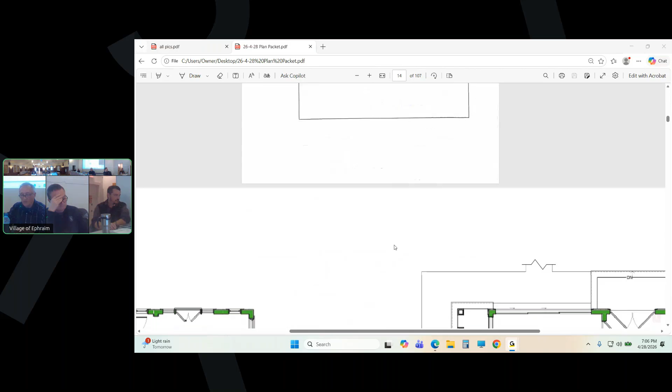For those that weren't here, the HPC did vote 3-1 to approve this. One of the stipulations was that some of the outside lanterns be removed. We didn't come to an exact number, and everybody was okay with it. One of the members was concerned about the railings on the water side, and pretty much comments about the roof lines came up, but it appears to have been better than the previous generation was. Other than that, that's about it from HPC.

I do have one comment or one question for everybody out there: do you have samples for us to look at? Okay, good. Yes, I do. All right, could you state your name for the plan committee, please? Drew Willman, Deleers Construction. Okay, thanks, Drew. Rick, why don't you start out?

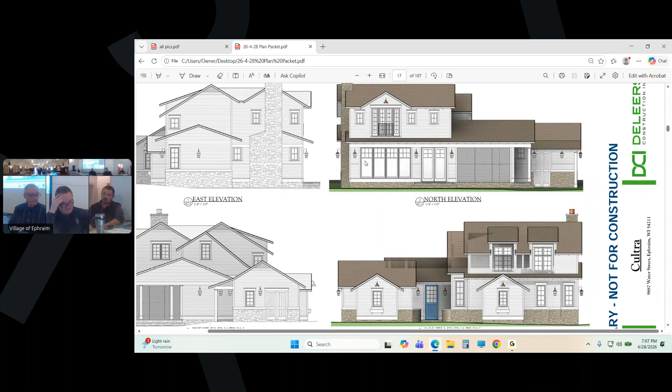My one concern that I have is the sheer number of roof lines. Can you give roof pitches for each one of those separate roof lines?

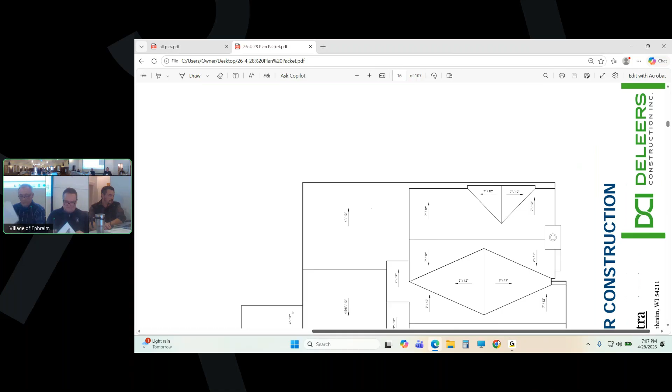Yeah, you're welcome.

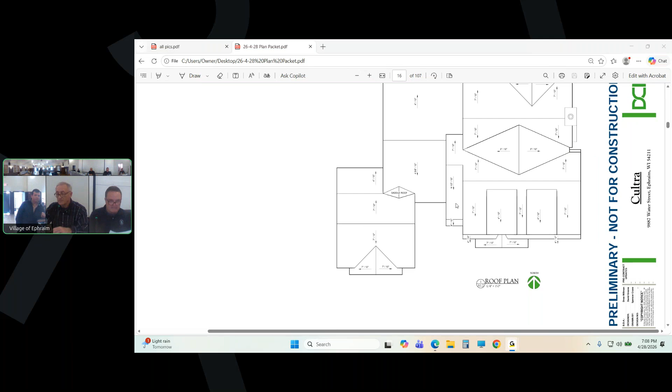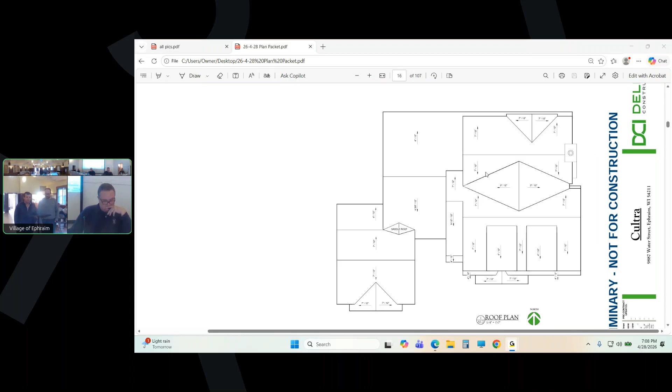This is John Cultra. I just wanted to introduce myself to those I've met a number of folks, but not everybody. I think my wife Victoria is on the line, as well as surprisingly one of my sons, so it's good to see some engagement from the younger next generation. Victoria and I were introduced to Door County and Ephraim in particular in 1992 by the Schmeltz family, Tony and Barb, and instantly fell in love with it, and haven't missed a summer or season since. We love Ephraim in particular, and all 4 kids, ranging from 25 to 14, every one of them has spent a lot of time here in the summers. So what we're trying to accomplish with this house is, as we've been rearing children for 25 years...

We have 3 years left with the freshman in high school graduating hopefully shortly. We plan on spending a lot more time in Ephraim, and each structure has a useful life to it. This house in particular we've been kind of patchworking for a while. We love the home, love the location, but unfortunately it just needs to be rebuilt. Our thought process is to get that going now, so it's ready for when we can spend as much time as we'd like up here. We really appreciate all the time and effort the planning committee, as well as the historical committee, have given to this. We want an end result we're very proud of, that the community is proud of, that fits well with the history and nature of Ephraim, and we really appreciate all your guys' hard work and consideration.

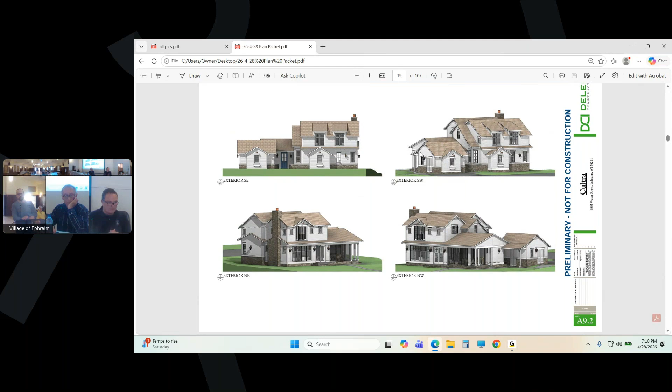I want to commend you also, I've been on the committee for the different concept reviews, and I appreciate your efforts to get the project closer to a quote-unquote Ephraim-looking house. You heard the comments from the HPC, and I share some of the concerns. In Ephraim, as we can see, the historic buildings have very simple roof lines.

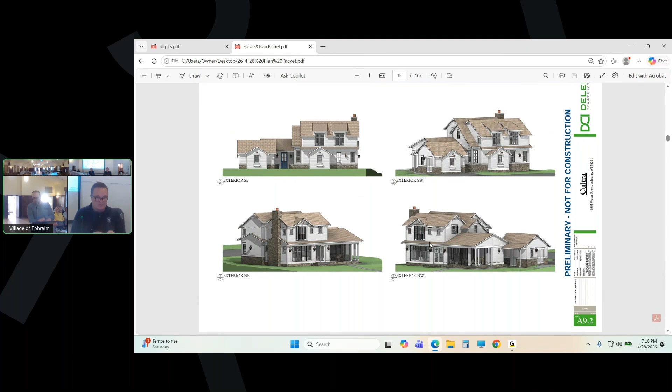My understanding from the materials is that the footprint is smaller than the existing home. Is that correct? That's correct, yes. But the additional space is being added upstairs, is that correct? To the extent the house is bigger by a few hundred square feet. Correct. Yep, okay.

I guess I also share, if some of the lighting could be reduced, I think I'm kind of consistent with the comments there.

I would ask, looking at the south elevation, and I don't know, I'm not an architect, but the home would be a little less busy if that roof line that is in the middle here -- I'm going to ask maybe a dumb question -- is that absolutely necessary for the design of the home? It is. The only reason that's there is for the staircase, to maintain head height to get to the second floor. Other than that, that roof does not cover anything other than the staircase.

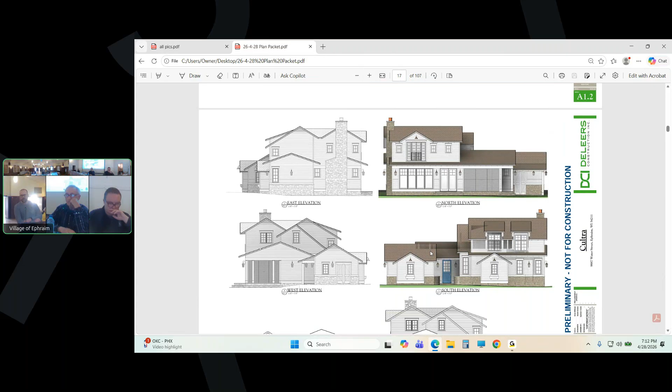For the staircase, and the staircase would need to be located in that part of the home. Yeah, we'd want it there, central to the layout of the home.

I'm having a tough time with the roof pitches, I just can't see this well enough. The shallowest roof pitch, is it 4/12 or 6/12? I can't tell, is it three? There's a saddle, non-visible from the ground, right there in the middle. That is a 3/12. Basically trying to keep it below the peaks of the other two ridges, so that brings it to a 3. But other than that, yes, everything is 4 or above.

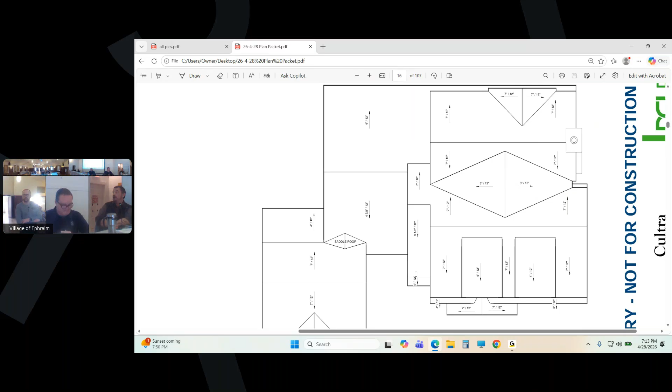So can we, with a non-primary roof pitch, accept something less than a 6/12? I think that's a question we probably need to address. I think there's a specific carve-out for dormers, I can carry on and try to find that language. I'm pretty sure it says the only way you can go below 6/12 is via dormer, and dormers cannot occupy more than 50% of the total roof area. And you can't go any lower than 3/12. I think it's in what you included in there.

The most shallow one is 3 to 12, is that correct? But that's for the saddle roof. It just helps shed water to the outside of the footprint of the structure. Otherwise, without it, water would pool in the center of the home.

While you're looking, Rick, do you have any comments? That's all I have for now. Okay.

I guess I do like that you did reduce the footprint, and I appreciate the Cultras working with us as well.

However, I do feel that the design still looks so busy. I don't know if it's the roof lines or the grids in the windows, but it makes it look too complicated, not a simple look, which we like to have in Ephraim.

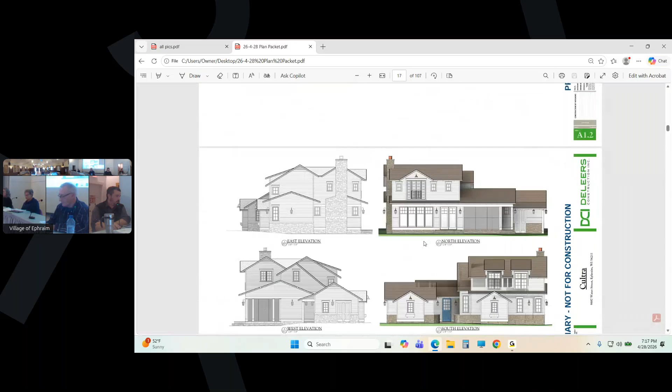If you looked at the west elevation, that would be the lower roof on the left. It goes over the screened-in porch and also, I think, the entranceway.

We allow less than 6 to 12 on dormers, and I don't think you could define that roof line as a dormer. It doesn't have a living space there, it doesn't have a window. So I would like to see that roof line back to the 6 to 12.

Yes, it can be brought up to 6-12. The intention of keeping it a little lower was to match more of the existing mass of the house. Going up to 6-12 will only increase our mass, with the existing roof being less than a 1 pitch over the rear screen porch area, which wouldn't be allowed in any case under today's code. So it can be increased to 6, but the intention was to reduce the overall mass since it's too large. Okay, I get that.

My challenge when I look at this is all these different roof lines make the house look very complicated, and maybe there are other ways to simplify it. Talking about that, let me ask a question. If we look at the south elevation, you have, I'll call them, 2 dormered areas on the first floor. They're almost like small bay fronts. I'm wondering what the whole house would look like if those were simply eliminated. I would think that would add to the simplicity, because they're introducing kind of a dormer look there, and then you've got a shed roof on top.

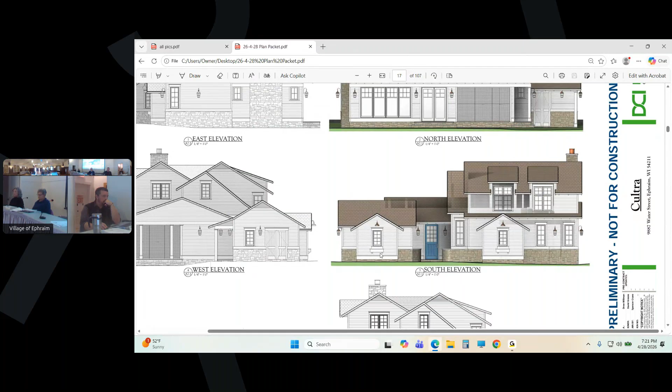But I do have a problem with the back because it doesn't meet our ordinance. The ordinance says nothing less than 6-12 unless it's a dormer, and I wouldn't consider that a dormer over the screened-in porch there. That would be the west elevation there.

Yeah, we can increase that to 6 there, and we'll add a couple feet to the height on that. I think it would also simplify the roof line above it that we see in front of the chimney. Is that a 6-12? I believe that's a 7-12. Oh, 7-12, okay.

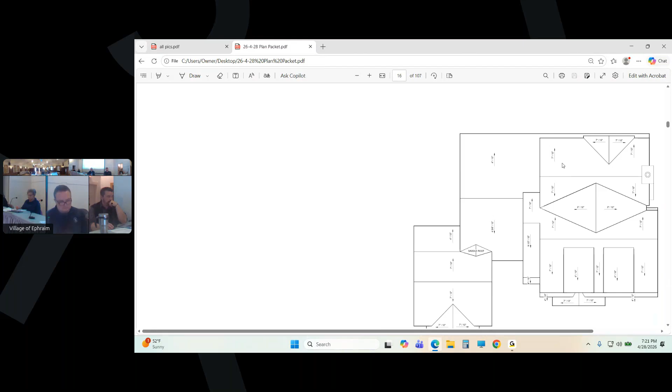Okay, yeah, there's a lot going on for us to consider when we talk about the simplicity of buildings. I think if you could work on those two front bump outs or bays, I would call them, and maybe the roof, the double shed dormers, I think that could simplify things. Okay, thank you. Those are my comments, BD.

Okay, thank you. With that said, I'm hearing the whole committee kind of looking for maybe another... well, we would either have to postpone or vote on what we have now, right? I'm sensing everybody would like to see a new design or an updated design. Yeah, Ken, do you agree with that? Yeah, but I think there's more options.

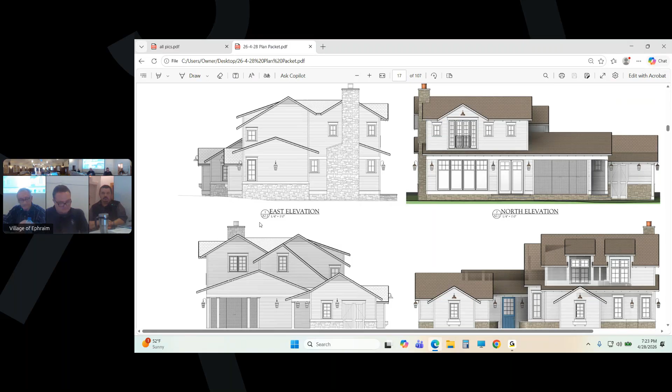Okay, right now, maybe Brent, I'm losing my voice a little bit. Maybe Brent could explain the timeline here. There is time for another submittal, and Brent, why don't you explain that? Yeah, so I know the Cultra team has been involved, and this was discussed at the last meeting.

We will touch on it later, the last item on our agenda. But at the same meeting in which we heard concept reviews for this application and the one coming after, there was a recommendation from this body to send a proposal to the village board to basically put a 6-month moratorium, or find a mechanism to force that period, stop hearing applications, so we could take a look at this ordinance and massage it to make it easier to interpret, answer some questions, some confusion from a definition standpoint, and address concerns over bulk and simplifying roof lines.

So the planning committee, or the village board, did set a public hearing for an ordinance amendment we'll take a look at later if we want to continue that recommendation. That meeting of the village board, where they'll be considering that ordinance change, will occur on May 12th.

So as of this meeting today, for this present application and any applications that come in completed form to me prior to, and this is if the board were to approve the ordinance change, we would still hear under conditional use any applications that come in prior to the board possibly approving an ordinance amendment.

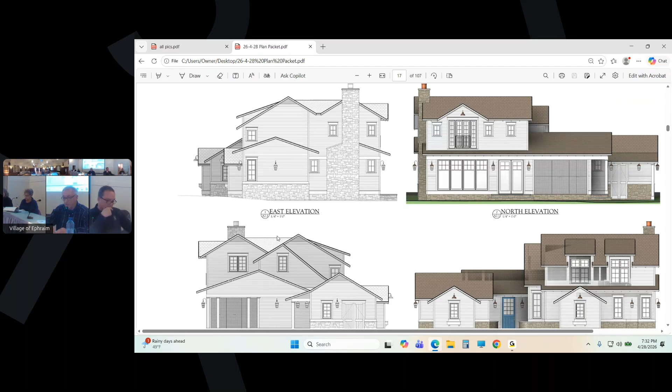There was, might as well address the lights. I don't know how many we have, but Ken suggested only lights by the interior, any exit door, which will take quite a few of them out of the picture. I have a bad memory. Rick, what else did we say? And then to address the shed bump-out shed dormers, either eliminating those or combining them into one. We'll combine.

And then also, in the new submission, we need to get everything fully dimensioned, and bring the samples back. Is it okay if I leave samples? Ordinarily I'll find a spot for them. They're heavy, but I'll find a spot for them.

Along with that too, just as we, you know, Andy, we're getting some feedback from you there.

I would just say along with the dimensions, we got into the roof pitches quite a bit. If you could break down the language discussed at HPC, at the Goltermann project, you know, percentage of roof above 6:12, percentage below 50. Yep, if we could address that number just to ensure the calculations, address that relative to the 50% dormer, or minimum of 50% dormer. I think that'd be great.

And then the landscape plan. Well, I guess what was discussed at HPC, and I think this is what happened with the Price project, there's a lot of question. I'm not trying to defend the process, but I think this is something we're going to come across, especially with conditional use projects where there's a lot of time, a lot of uncertainty tied to this. So for me, I wouldn't expect to see a finished landscape plan with what's it going to be for plantings, if it's ready.

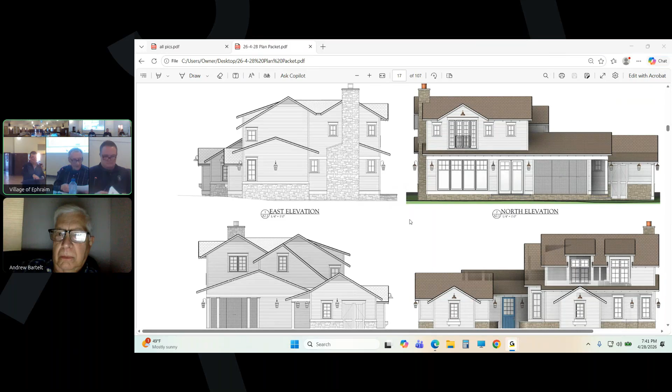Okay, would you like to? Okay, the Goltermanns were before us for a concept review last month. When Greg was here, he kind of walked us through the process that led him to the concept review last time. As he stated, he had an initial vision of salvaging as much of the first floor as possible and just building a second floor on top. He wasn't able to find a contractor that was willing to do that, or suggested doing that.

Similar to the item we just discussed, both at HPC and planning, there was a fair bit of discussion and feedback relative to a formal approval, areas of concern, things they might want to consider tweaking. Greg was not able to attend this meeting, but he did submit two documents, one more lengthy than the other. It got into the weeds a little bit as far as the steps they made in an attempt at a new design concept. Probably the biggest is a return to their initial vision of retaining as much of the original first floor material as possible and then building up from that.

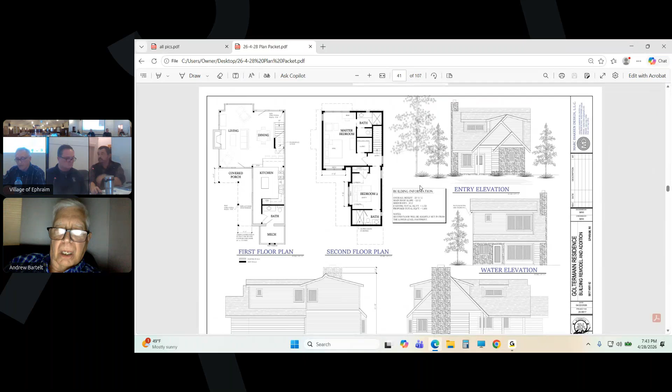Okay, as far as HPC goes, we were all very happy with the rework plan and very happy with the way Greg has been working with us to make changes and do what he needs to do. We did not take a vote, obviously, because it's a concept review, but we're very happy with him and his design. So with that said, Ken, are you still there? How about Andy, have the mic? Yes, I'm here. All right, what do you have to add?

This is Andy. I'm pleased with that. I'm hearing what the HPC said is good news, and if they are happy with this, so am I. I think, as they said, trying to reuse as much of that original material.

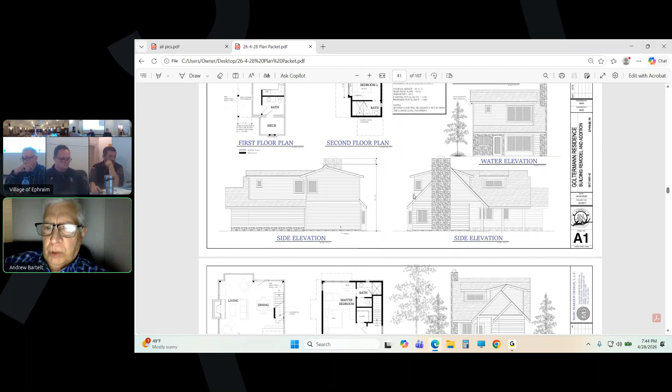What color is all of the siding going to be, and is it going to try to replicate the wood log look? Yes, he's reclaiming as many logs as he can, and believe will be keeping it the same color, won't he, Brent? Like a dark gray? Yeah, gray and Door County natural fieldstone. Well, they certainly have reduced the overall mass of that second story that sticks out toward the road.

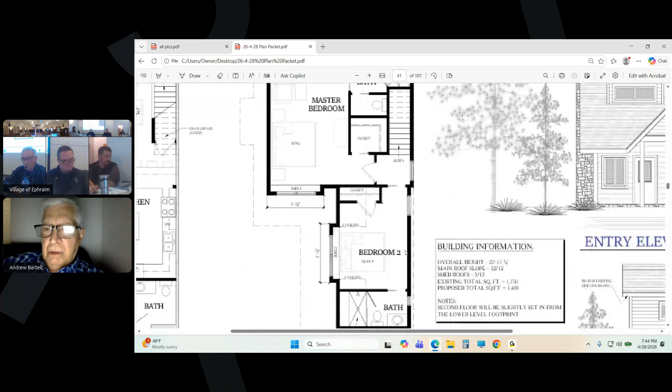And I find the multiple gables and roof lines sort of less distracting than I would have thought, because it does kind of give it more character than just seeing one big massive structure there. So I have no real concerns.

Okay, Ken, are you still there and able to speak? Yes, I am. I agree with Andy's comments. I appreciate what they've done on, I guess it's the north wall. That was a large blank wall before. And the way they're, on that side elevation on the lower left, kind of breaking it up, reducing the mass part of it. Also what I really appreciate is the reuse of materials as much as possible. I think that helps a lot. I don't really have any other comments.

I would like to see more on the colors and stuff beyond just what it used to look like, because the problem is we won't know what it used to look like when it's gone. So some kind of color samples, since the logs have obviously been painted. It'd be helpful to have colored samples, and all their other materials also. Sure, that will come with the design review, right? Yep. Okay, anything else, Ken?

Oh, thank you. Okay, Monique. I'm just going to echo what Andy and Ken said. I really appreciate them taking the feedback that we gave them and making changes to the plan and simplifying things, and especially keeping the old log. I think the spirit of the building will stay there with these new plans.

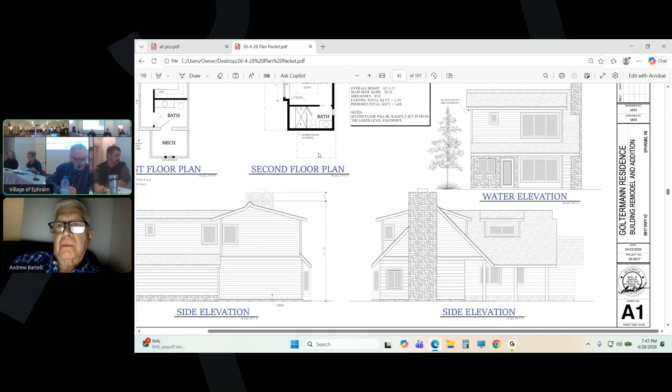So since it's concept review, we do not take any action, move on to the next one, right, Brent? I'm good with that. Which is number 8. Matt Lalonde, 9890 Water Street, deck guardrails design review.

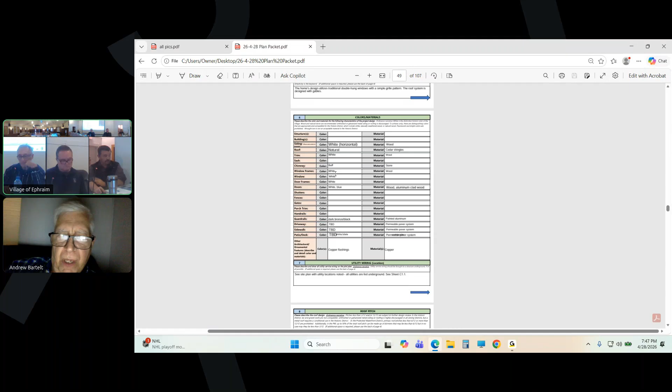Okay, we have a nice application showing before and after photos, or existing and after photos. This again is basically across the street from the two projects we've been talking about. The existing picture really shows us the property we're looking at. But in short, it's taking the second floor and first floor existing decking system and guardrail and replacing that with what you see in the concept drawing below.

Material colors, and we have a material sample and color sample of the decking. It's a Trex type in dark gray for those that aren't with us. And then the railing system is aluminum, and as shown in the submittal, that would be white. I mentioned aluminum for material, but it's aluminum guardrail, handrail material.

With that, another project that went before HPC, and they did make a recommendation. BD, if you'd be so kind. Okay, HPC did make a recommendation to approve it. About the only real comment, everybody thought it was a better look. One person had comments about the blue doors, but there was a 4-0 approval to send that on, recommend approval from Plan Committee. So with that said, Grace, would you like to take the mic?

No, maybe no mic. That's right, no mic. I move we accept the deck and guardrails for Matt Lalonde at 9890 Water Street as presented. Does anybody have any discussion items for this? Second, you need a second. Andy said, I'll second it.

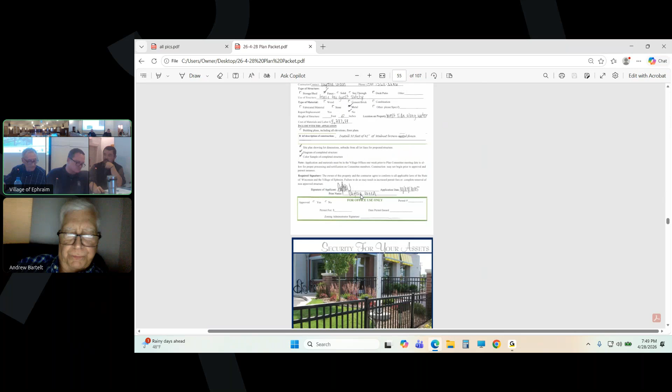Number 9, Pine Grove Resort, design review for a fence at 10080 Water Street. Okay, our last historic district item, proposed new fence on the Pine Grove property. BD was kind enough to go take some pictures. I'll flip through those after I'm done with my.

Basically, it's along the waterfront. Originally, and you'll see this in the site, they had indicated at one point to be 4 foot high and black metal. I informed them that for a compliant see-through fence, it has to be 42 inches high and no higher than 42.

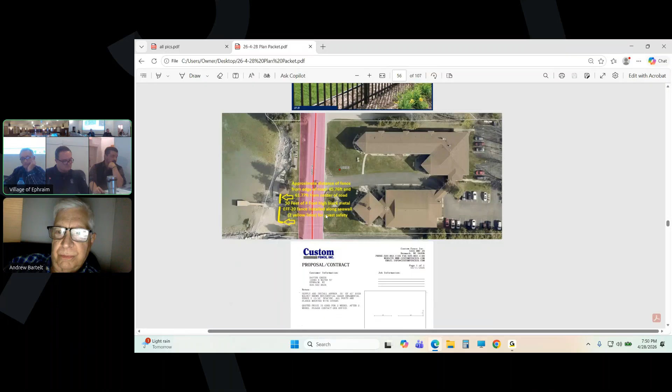And then just expressed the overall concern within the historic district, the desire for natural materials, wood or wood-like, and browns, grays, weathered wood. So he did go back working with the contractor on a custom fence, and come back with a submittal that is a 42-inch fence in a walnut brown color.

Flip through the pictures I mentioned, and then ask BD to provide the recommendation made by the Historic Preservation Committee.

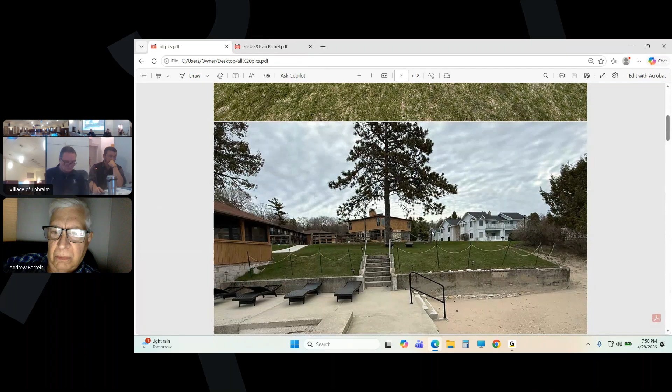HPC voted to deny the application, and we didn't feel that there was nobody here to speak for Pine Grove, and we did not approve of the metal railing. We didn't really want to see that on the shorefront, and we had questions about where the black lawn chairs are.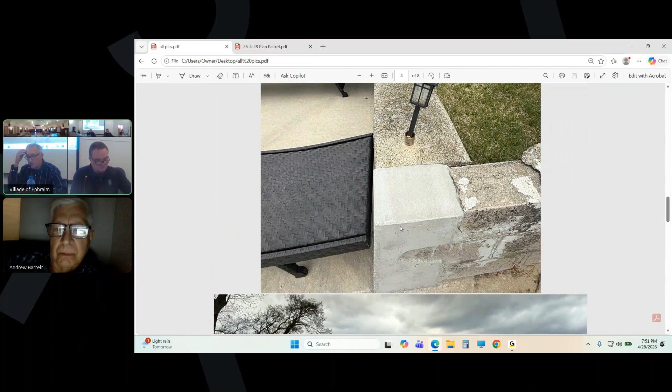There's a bigger drop off there, so we didn't really know what they were looking for. But we recommended that if they were going to do something, they come back to us, and we were proposing a split rail fence, which would match what we have in other parts of the village. So the application was defeated, but nobody was here to present their case.

Yeah. Okay, having said that, Andy, questions, comments?

You spoke to my question, and that is, this is metal, right? It's not composite or anything, it's actually metal, but it's walnut instead of black now. Well, correct, it was a metal. It's black or something, but we defeated their application.

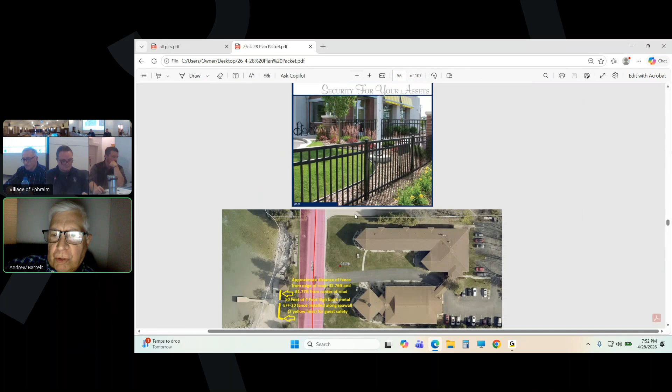We did not. Right, and I take that seriously. I think that's a legitimate concern, and you'd like to give them the opportunity to explain why this is preferable. So I would defer or delay or simply vote against it at this point.

Okay, Ken, can you hear us? I can. To me, the fence as proposed certainly doesn't look simple. There's a lot of spindles on it. I would certainly prefer that split rail fence look that we have. It certainly does the same thing as keeping pedestrian traffic moving through, but I don't think that's the appropriate fence, even in dark walnut, with that amount of vertical spindles for our waterfront.

Okay, thanks. Rick? I would echo what Andy and Ken have said. I think that a split rail fence, I mean, in their application, they're talking about it's for guest safety. I don't know if that accomplishes that to the same degree, but they're not here to discuss that. So I guess I would echo what has already been said and would say that we not accept this.

Okay, Monique? I agree with what's been said. A split rail would be a change around. Grace? I agree, either a split rail or increase the height on that little stone wall.

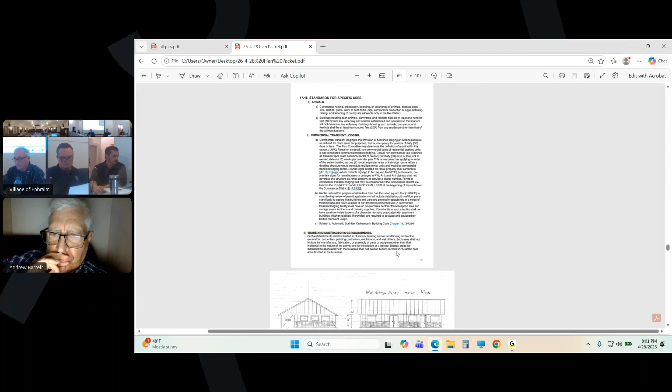All right, Ken, if you're on, do you have some comments? It came up last time also, and just to make it again since we're getting ready to approve: for a commercial building of this size, is there not a bathroom requirement?

It's not for public access, it's strictly family property, family use. It's a storage garage, for private use only. Well, I understand that, and I guess that comes out with the review, and possibly state or county requirements.

But yeah, we don't have any requirements, Brent? All I can say is our inspectors, like when I was a residential inspector, are bound to uphold the letter of the residential uniform dwelling code, for commercial, that's international building code, whatever it might be. I talked to him before, I haven't been in, I know David's had some conversation with him, but that'll be relayed because it's specifically noted here that we would expect, as with any project, that the letter of the law will be upheld. If they require some type of sanitary, but I don't administer that code.

The other thing is you mentioned the removal of some existing storage on the adjacent lot, just to make sure when we condition this approval, do we have a way of specifying exactly what lot that is? Yeah, I can find that as the deliberation continues, so we can cite that and reference it.

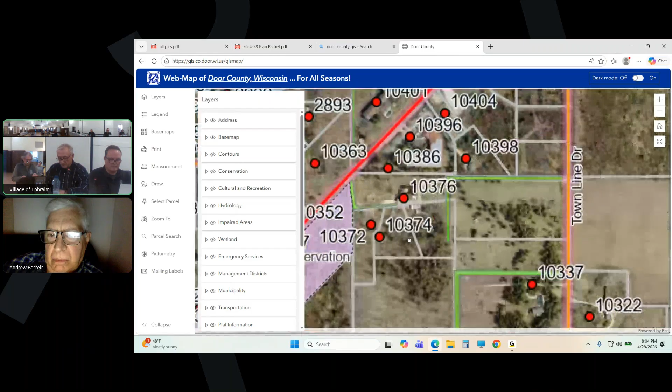David, so these objects that are non-permitted, that we're going to probably look to have you remove in order to approve this conditionally, are those on your property directly to the west of this property we're talking about today? Yes. The objective is to not need those anymore and move into the garage. Understood, in the big picture, yes that's the plan. I don't have, other than the unpermitted objects, structures on the adjoining lot to the west, I have no issues as submitted.

And for the record, it's just really an opportunity to provide further to this. If you're unpermitted, obviously there's a process for that, but it's kind of similar to when we issue alcohol licenses or anything - if someone has anything outstanding, they haven't paid this, that, the other, we take care of those things before. To me, it's just an opportunity to further tie that out, to give it teeth.

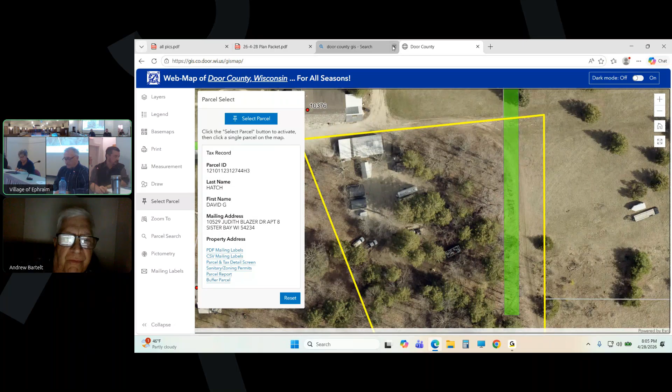Is that how - if it's a residential garage, David, you're limited to 1,000 square feet. So the whole reason for part of this process, changing to commercial on top of doing the duplex, was so then you could build a new garage. You can have a home in a commercial district, but it's 3,000 square feet, 5,000 square feet. You can have an accessory that's 1,000. So for me, the only reason this has legs to stand on from a 2,400 square foot standpoint is as part of your commercial trade operation. That's how this is worded.

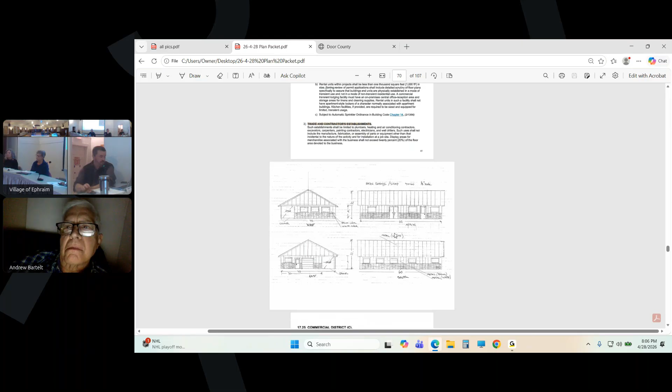So your point is because of the size of it, it is designated as a commercial use? It's only for trade and contractors. Correct, it's a special zoning. What was your comment? I said this application only applies to trade and contractors establishments - that's the only reason you're allowed to do it, as Brent pointed out. Well, does that change things in your mind?

I'm going to use it the same way that it was classified differently. I'm wondering if there's confusion in commercial as like open to the public, or just for use as a workshop and creating things in the space. Correct, yeah, it's a staging area - most of my projects are off-site. It's a place where things are stored. It's a workshop because I'm a carpenter. I mean, dentists have a dentist chair, I have table saws.

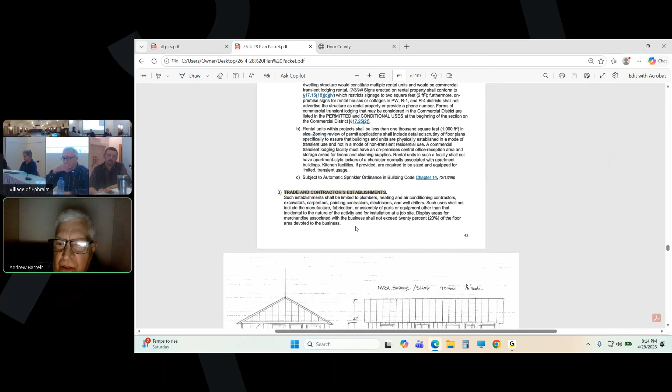Well, my only clarification was Brent's comment earlier about a maximum size of a garage. And this looks a lot like it's going to be used as a garage, or is only a portion of it used as a garage? Is that irrelevant?

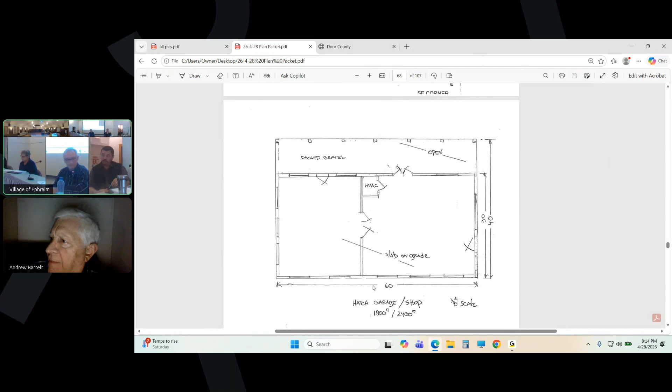Or Brent, did I miss? I don't remember exactly the context of your comment, but you said something about—and I'm sorry, I don't have the ordinance in front of me, or I can't find it—where apparently in commercial north, there's a maximum size of a garage. Correct, and the 1,000 square feet, when I referred to it as a garage, was that 1,000 square feet number, and then as Ken stated, there is a mechanism to go larger than that by conditional use.

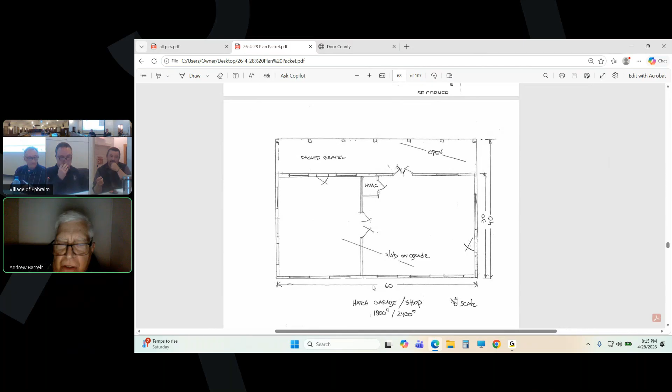But again, it's, I guess, what's the path of least resistance, or what makes the most sense. Yeah, I have no quarrel with this. I just was trying to clarify that garage issue, and it sounds as though it's not an issue, so I'm satisfied.

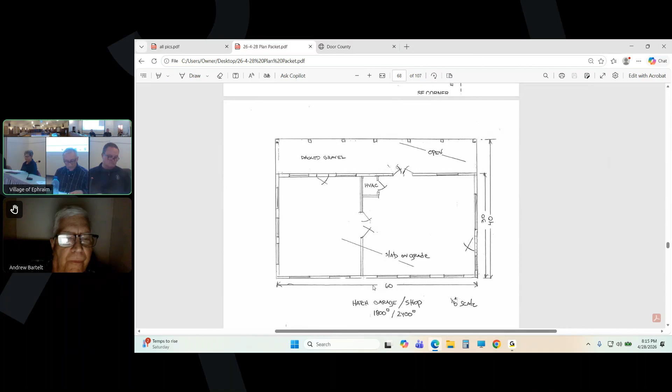Okay, I'll give it a whirl. I move that we approve the building zoning permit application by David Hatch at 10529 Judith Blazer Drive.

Is that correct? No, we need to do town line parcel property, sorry. We need to do that. CS mailing address, thank you. Number 10337. 10337 Town Line Drive. That's from a previous application. So I think we have to go with the parcel as it exists today, which is on the zoning permit app: 121.01, 123, 127, K1 and K2.

Is it on the app, or is it? Yeah, it's on the screen also. Oh, thank you. Okay, I see up there. Okay, great. Let's start over again.

I move that we approve the building zoning permit application for David Hatch at tax parcel 121-01-123127 K1 and K2, contingent upon removal of unlicensed and unpermitted structures and a legal easement created with his neighbor for driveway access.

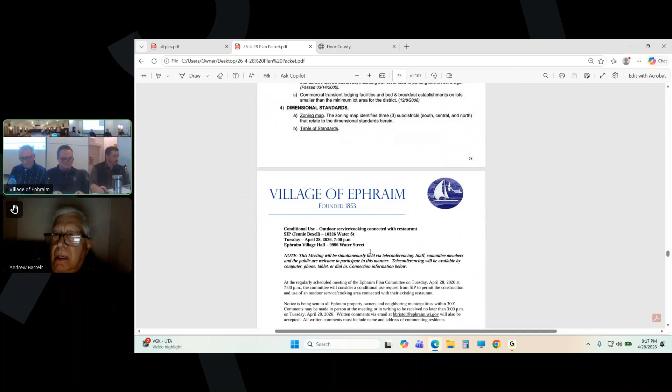Well, Brent, I'll let you do this. Yeah. Okay, Jennie is here. She's been before us a few times, but it's been a bit. I'll let her speak to the whys of the project. Freddie's here too. You may join me.

Ultimately, process-wise, they're looking to add a gazebo type structure on the outside of their property, as shown in the submitted plans. What we've come across before is they are looking to utilize this new area for outdoor food and beverage service. We have lots of restaurants with outdoor seating areas, and generally there's not a heavy process involved. We take a look at parking and things like that, but it's the outdoor service that triggers a conditional use. This is a conditional use hearing, and I did not receive any correspondence on this one.

Oh, I assumed you were gonna do all the talking. Well, Brent told us where we're allowed to put this gazebo. We moved it - we had a plan, a thought, but we moved it, so if you scroll down, yes, right there on the north side of the building. We literally just want to have an outdoor bar and a little bit of a grill, and not have to carry everything in and out every time because of weather. We just wanted to have a roof over it, so a gazebo was the easiest way to do that. Tents don't last - it's too windy up here.

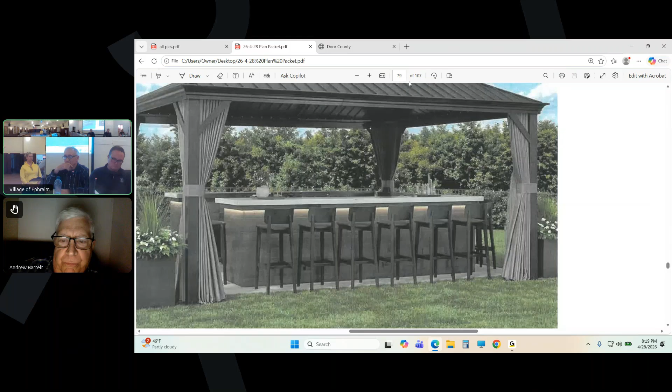So we found a 13 by 17 gazebo that we want to put in that spot right there, to be able to have just a little outdoor bar. We're actually not adding any seating, so we didn't even talk about parking because there's not really any changes to that. The picture of the gazebo was just a rendering - I had help putting a bar under it, but that is the structure we're looking to add. Any questions?

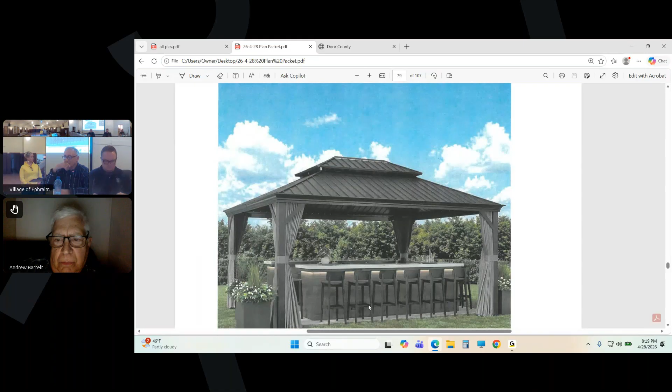Do you have anything, Andy? You're adding 6 seats - I don't understand. This may not be a big deal and I'm missing something, but you said you're not adding any more seating. We had seating there prior, so it's 6 different seats. We're just trying to cover some seats, having it more secure. Oh, okay, thank you.

So this is a permanent structure - this will stay there summer and winter, or no? No, I think we're gonna be taking it down in the winter because the roof can't handle the snow loads we've been having. So just for the summer? Yeah, it's seasonal. And the cooking part of it, the grill or whatever - that will be put away too, everything is seasonal. I see, yeah, okay.